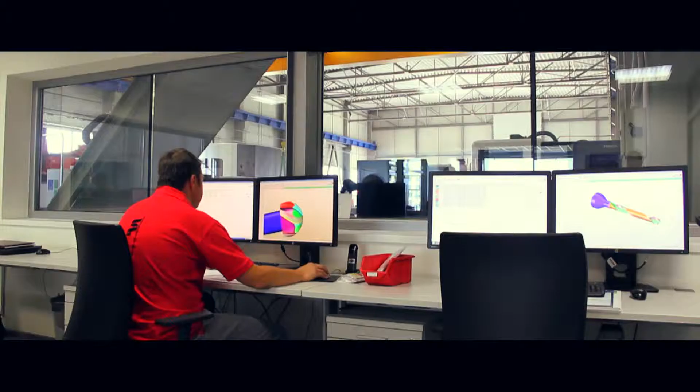MASAM, a young company with perspective that was founded in 2001. MASAM dominates in its field in two fully fledged divisions. The first division is the sharpening of tools. The second is the machining and tools division.

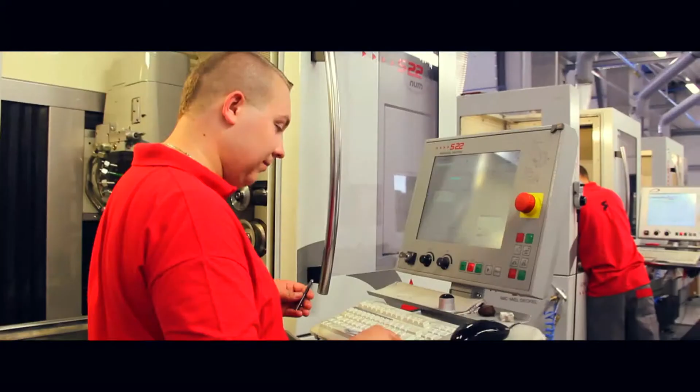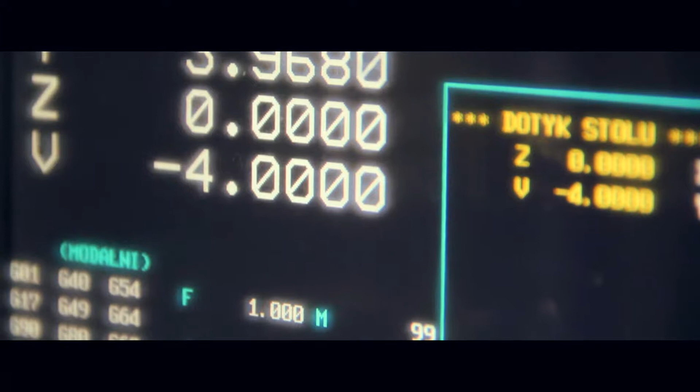The company produces products particularly for the automobile industry, a company that is a leader in its segment, dominating in the area of the production and sharpening of tools. MASAM has long exceeded the bounds of regional companies, trading flexibility, innovation and bold challenges. These are the characteristics of MASAM.

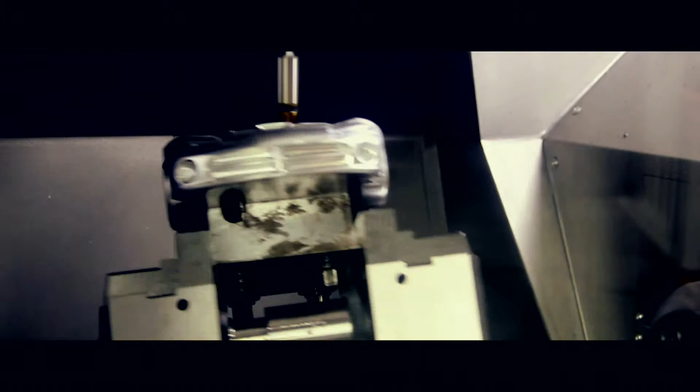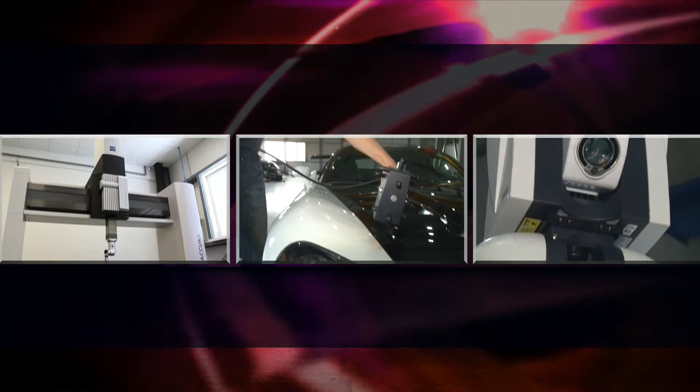MASAM demonstrates its high level of professional expertise through its very own 3D laser measuring system. MASAM utilizes static and mobile 3D laser measuring systems.

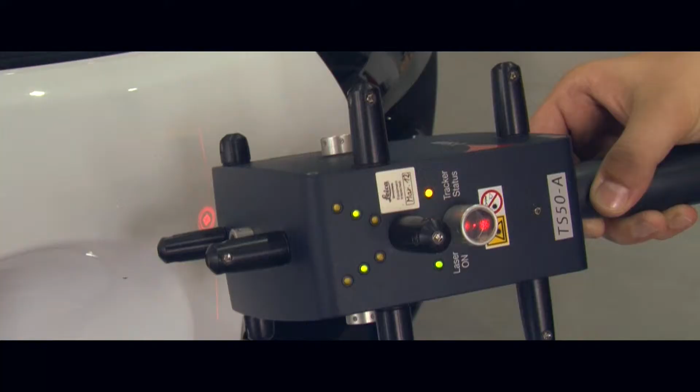A fitting example comes courtesy of the story behind this sports car. You are now looking at a real, exclusive model. The MASAM specialists had no technical documentation available for the car. And this is another example of the added value provided by MASAM. MASAM takes the care of the customer upon itself. They literally took the sports car into their own hands.

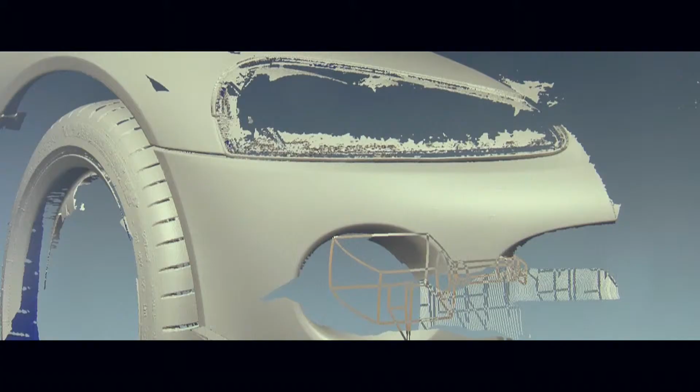Let's take a look at the main reasons behind the scan. Following scanning, the MASAM specialists can work with data adjusted according to the client's requirements and then carry out production, thereby saving both time and money.

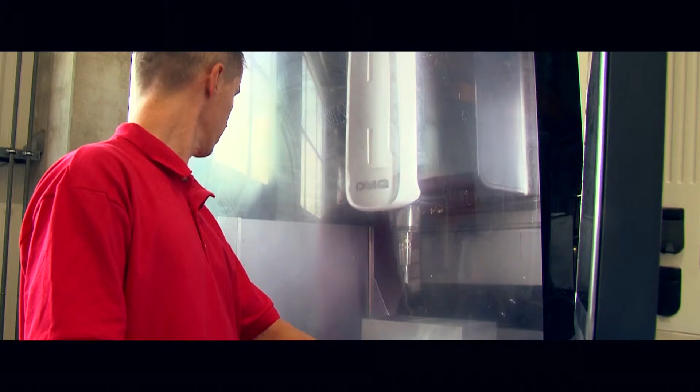New technologies have increased quality control to the maximum, thereby increasing product production and verification. And all this under one roof. The product does not leave the factory. The customer can count on receiving full service. The piece being machined is directly on the machine.

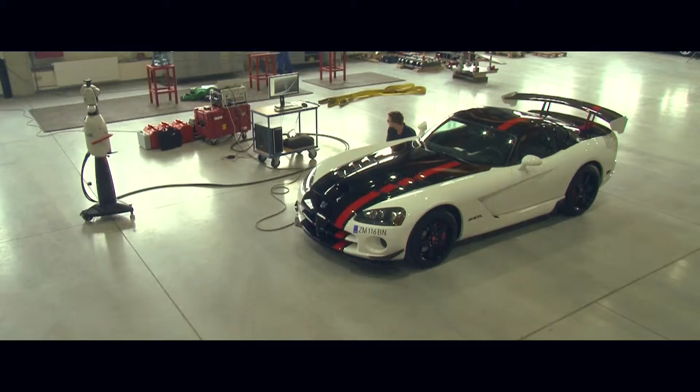Let's return to the sports car. You are looking at exceptional shots. Within a few hours, the real sports car is transformed into a graphic depiction containing exact data, which is the most essential thing for the work to follow.

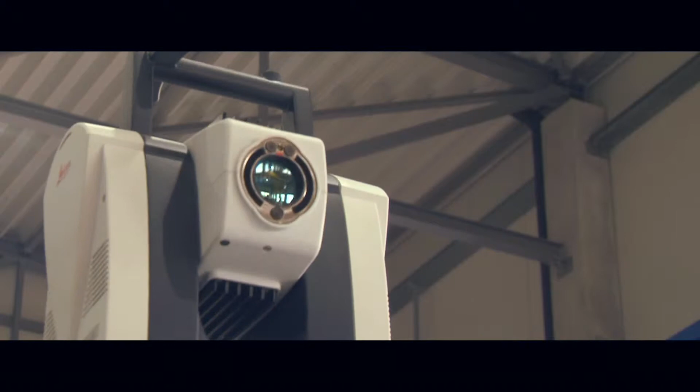The measuring system operates on the principles of lasers, reflection, and the capture of this reflection. The system scans height, depth, and width, and is movable in all directions. On the scanned area, a virtual cloud of points is created, which in turn, special software processes into a visual form. The exactness of the measuring is at the level of 1/100th of a millimeter.

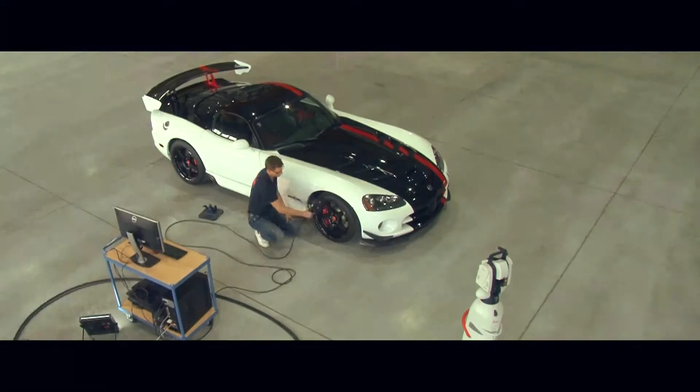This beautiful sports car is slowly being converted into summarized digital data. Each detail is measured exactly and subsequently digitalized. The specialists create blueprints.

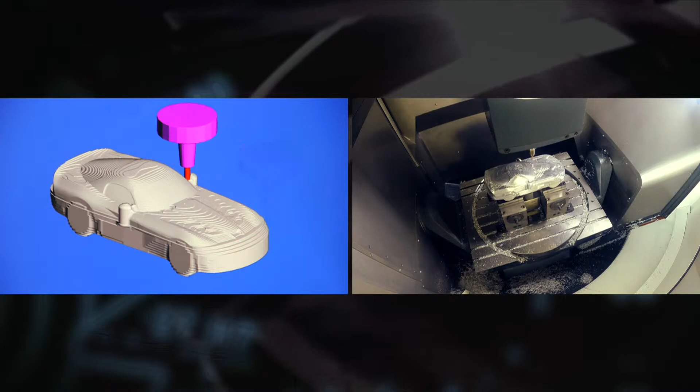The fully automated milling cutters receive commands, and in a while you will see a beautiful scale model of the sports car.

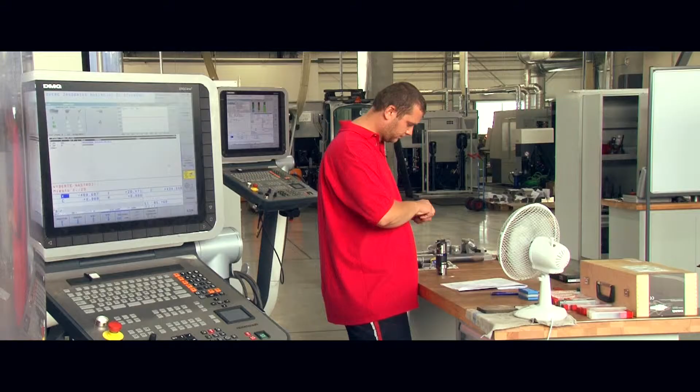It's always about accuracy and efficiency. Any part of a product can be scanned. Ultimately, of course, this speeds up the work. But have no fear, this is not at the expense of quality. In fact, MASAM realizes that quality is always number one.

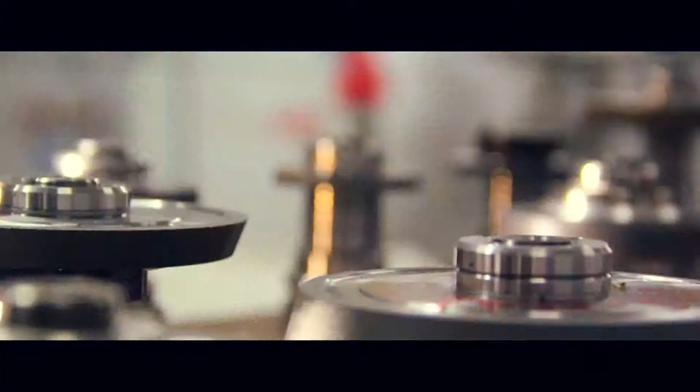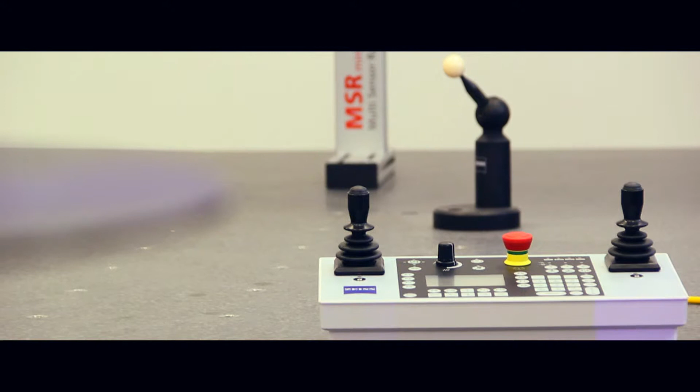The scan itself may take several minutes to a few hours, depending on the size and geometric complexity of the object. MASAM has specially designed workplaces for static scanning. Light, heat, and anti-shock insulation are par for the course in such a workplace. After scanning, the software can process the data as cloud points.

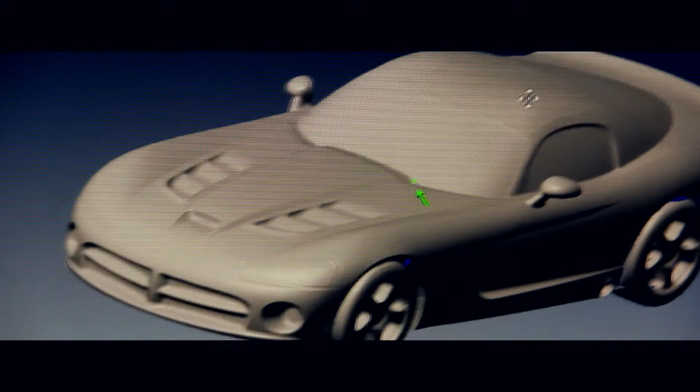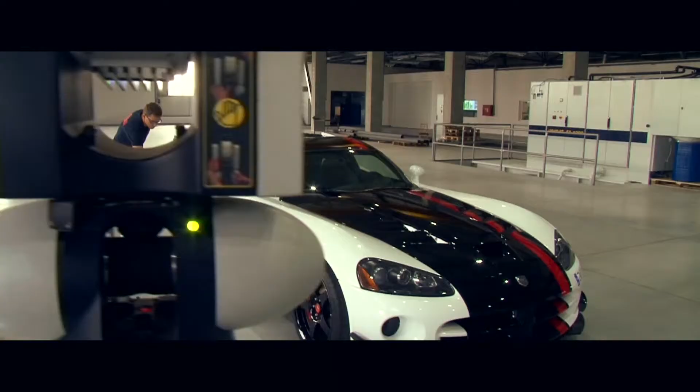Why scan? Scanning is performed especially when documentation is missing. MASAM knows how to digitalize the required components very accurately. Without this system, the reverse engineering of such components would be very complicated, expensive, and moreover, inaccurate. They make copies of the existing components for products. If 3D data is missing, they add it expertly, once again, in thousandths of millimeters.

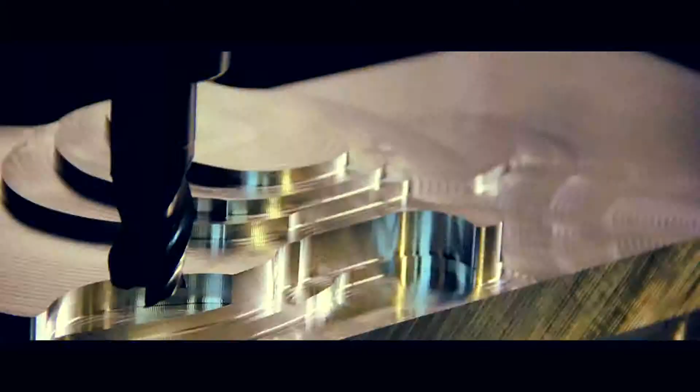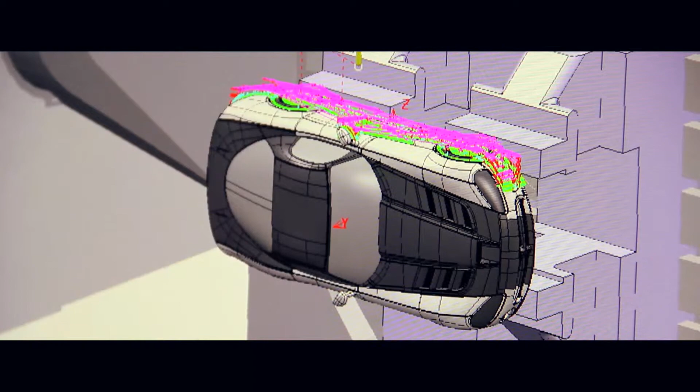The naturally highly specialized IT section has published new visual documentation which truly reflects the piece, which in our case is already in production. Of course, the production and sharpening division forms the necessary tools or cutters in order for the second machining division to produce the reverse engineered car.

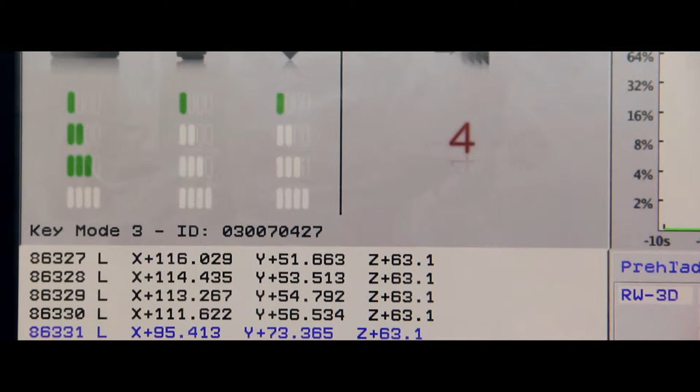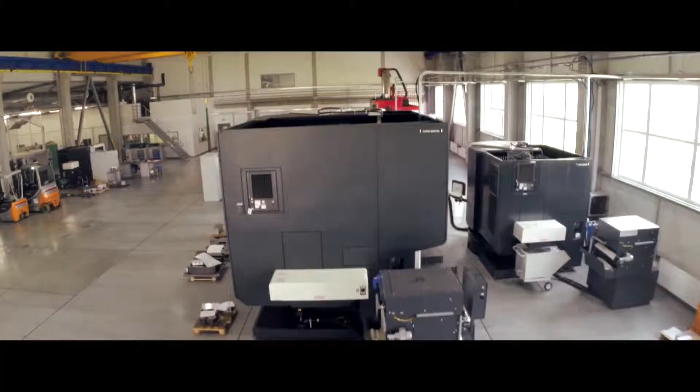At MASAM, accuracy is one of the most important attributes. Skilled workers, engineers and technologists are well trained and have sufficient experience with every object and material. Constant practice, training, the purchase of new technology in the segment of 3D laser scanning conducted by MASAM professionals all make the company one of the world leaders in the field of engineering.

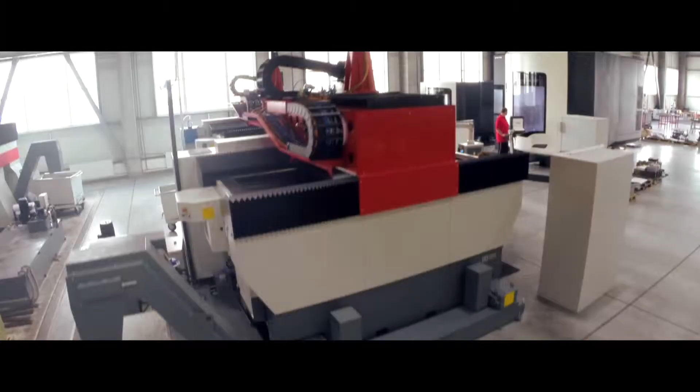You can turn to MASAM with confidence. See the precision, expertise and work effectivity for yourself. The story behind this sports car is testimony to this. The original stood in the MASAM production hall initially, and the outcome, without any blueprints whatsoever, as you can see, is this beautiful reverse engineered model of the sports car.